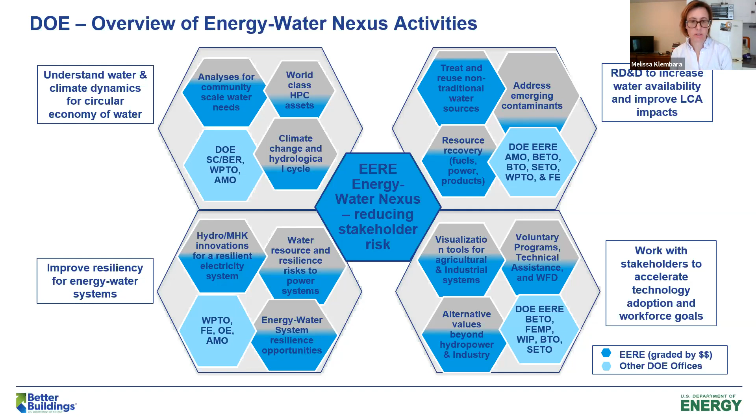The series of our presenters is going to be Prakash Rao from Lawrence Berkeley National Lab, who's going to talk about this big impactful report that we're doing with the Advanced Manufacturing Office. Prakash works closely with the Advanced Manufacturing Office and our strategic analysis team, thinking through the potential in the energy water nexus space, especially in industrial wastewater treatment, and was a big contributor on the desal bandwidth study that became very important in the vision for what impact we want to have in desalination in the energy water desal hub that we're doing with the National Alliance for Water Innovation, which is actually led by Lawrence Berkeley.

And then we're going to have Rishabh Bahel co-present with Kiran Thirumaran at Oak Ridge National Lab. They are going to present on a case study that the National Alliance for Water Innovation is sponsoring with Cleveland Cliffs on the steel industrial area for industrial wastewater treatment. And if you can go to the next slide.

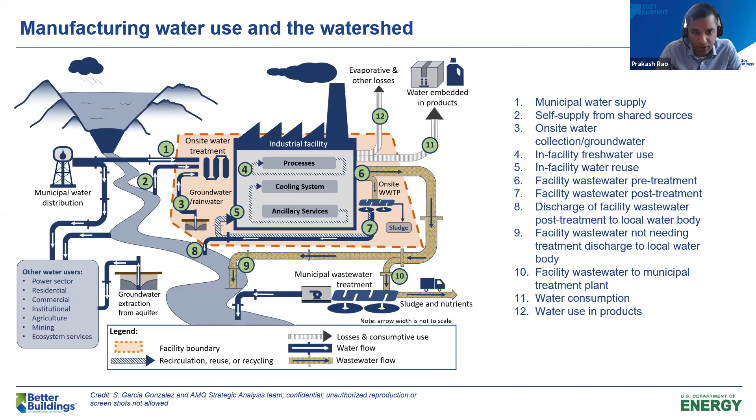Next slide please. If we look at how much is on that 1, 2, and 3, the water intake, this is from 2010. The last estimate showed about 21,000 million gallons per day of water used for the manufacturing sector, about 6% of all water resources in the U.S. That might not sound like a lot, but the map on the left shows concentration.

If we look across the map, each of those little geometries identifies counties. You see really high concentrations in some places like Lake County in Indiana, Brazoria County in Texas, right by Houston. These have very large concentrations of manufacturing water intake.

While it's 6% nationally, in some of these counties, about 60 or so, manufacturing water is actually about 75% of that county's water intake. So it's really spatially important. As mentioned before, it's really hard to transfer water long distances, so these manufacturers are a very important user of water within the communities in which they live.

On the right-hand side you can see the data chopped up differently, looking at state by state. Indiana, Louisiana, and Texas are 1, 2, and 3 manufacturing water users. But perhaps more interesting is what sectors of the economy are using water. There, 95% of manufacturing water use sits within 5 sectors, and these are all estimates.

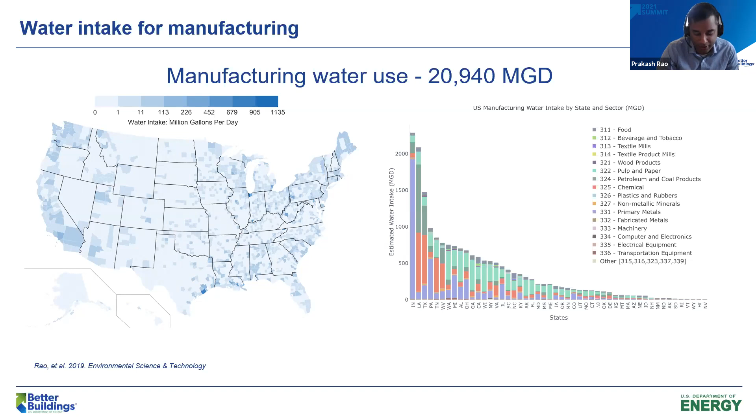Next slide please. So that's looking at the intake. If we look at the exit, the wastewater, that's where the interaction with the municipal plant might happen, whether on the technology side or whether it's sending its wastewater to the municipal plant for treatment.

On the left-hand side, what we've looked at is based on permits and the names of the contaminants in the wastewater that need to be treated per the permit. Chemistry savvy people will note some listed here are actually test methods for an indicator, some are actual chemicals, but it's what's on the EPA permits. We wanted to show this to outline how municipal water is different from manufacturing water.

Where are there differences where we need different technologies and approaches, and where are there commonalities where what they're disposing and need to treat is similar? The Venn diagram in the middle shows things like BODs, nitrogen, phosphorus, alkalinity, oils and grease, dissolved solids, solids, suspended solids. Those are common.

They're going to see common wastewater treatment methods within the two sectors, municipal and manufacturing, to treat those. But manufacturing also has some specific contaminants you don't always see in the municipal sector, shown here on the right-hand side, like nitrate compounds, ammonia, sodium, et cetera.

As we think about the treatment processes and the technologies, you can broadly break them down into three categories: physical processes, chemical processes, and biological processes for treating these wastewaters. Some are common with municipal and manufacturing wastewater treatment, some are not, or are less common.

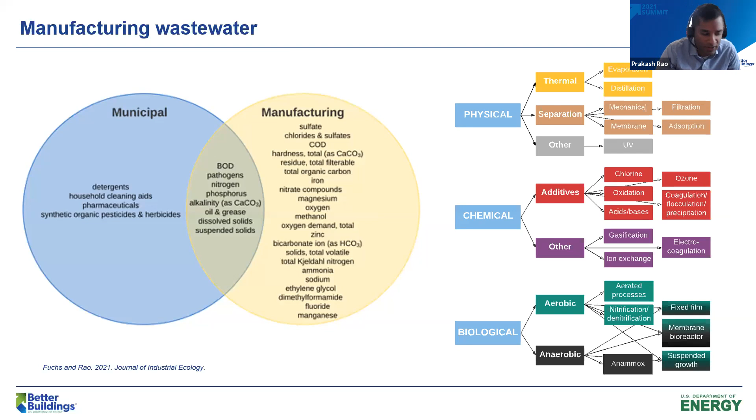Thinking about what we could do regarding water conservation and water management, and what really drives this - the common refrain is that water's pretty cheap, and that kind of hampers efforts to conserve water.

But we've started to consider this from the WRI, World Resources Institute's Aqueduct tool, the way they look at water risks, quantifying them in terms of physical risks, both quantitative and quality - so either there's not enough physical volume of water, or the quality is too poor to use for the purposes the watershed needs.

There are other risks too: regulatory and reputational. Regulatory might be imminent regulation on water, whether limits on groundwater usage or limits on how much you can pull from a lake. There's also reputational risk, harder to pin down, which is the idea that you're given a community license to use water, and at any time that community can revoke that license through community action. So there's a drive to be good stewards of water to avoid reputational risk, and of course, just to be good stewards of water.

If we think of what we can do on the right-hand side - it's a fancy graph with a box and whisker plot, don't worry about the details. The idea here is that as we think about risks and water conservation, we think about what are some easy things we can do where we need technologies, or places where we don't need technologies because we're actually already using the right things.

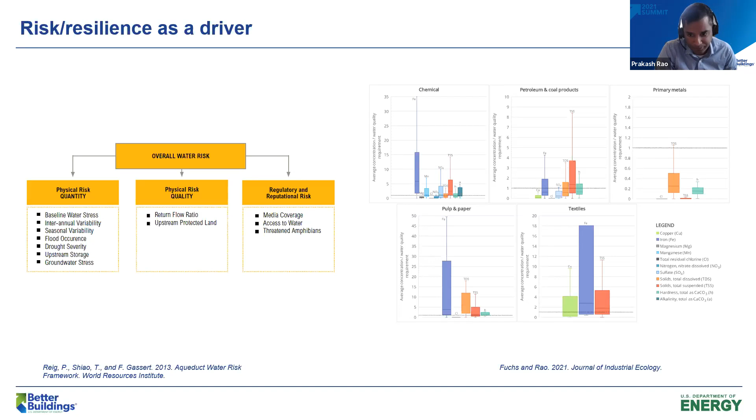Just to highlight some of the great things our partners are doing in the technology space, Nissan and Harbec are two partners in the water savings initiative of Better Plants. Nissan optimized their paint shops and the rinse systems within those, which is a huge energy and water user within the manufacturing footprint at the facilities. By spending $600,000, they're able to reduce their water use in the rinse system by 65%, almost 50 million gallons a year, just by optimizing how the paint plant uses water and being able to reuse more.

And we talked about rainwater harvesting. Harbec is a partner, and both these solutions are on the Better Building Solutions website. They are investing in rainwater harvesting, and they've been able to save 800,000 gallons per year by digging rainwater ponds and using it to offset cooling tower loads. The cooling towers are running great, no concerns. I know there's some concern about doing that by some, but their cooling towers are running great. And they're also saving on fire insurance because the ponds provide another layer of fire safety.

So with that, I think I'm probably a little bit over my time, so I'll just wrap it up and thank you for your time, and look forward to any questions.

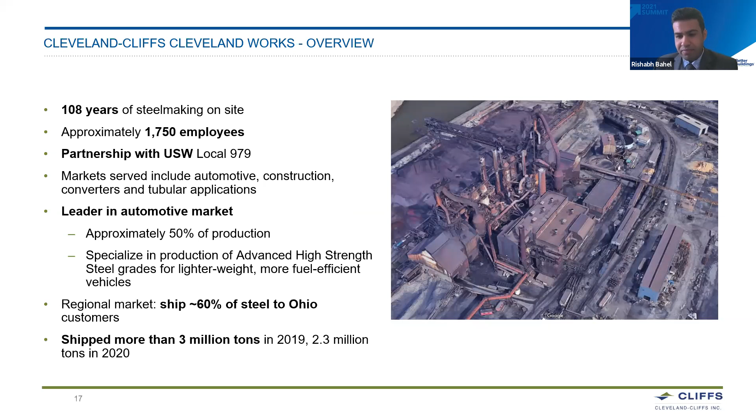You're using water for quenching at the hot rolling, at the hot rolling coiling, and the cold rolling. But other areas where water gets used a lot is at our powerhouses, where the boilers are consuming water for steam production, at our blast furnaces, our BOFs. The main issue is that we are using a lot more water throughout our system.

Out of which, what Prakash was saying, three are the main areas that we are pulling water from, and that is totally true for our case as well, with municipality at number one, and shared river resources at number two. For us, the shared source of water in the Ohio region is the Cuyahoga River, and we rely heavily on pulling water out of that.

But again, we have to be in compliance with the NPDES permits and other requirements. So we treat it and bring it back into the river. 6% of the water we are consuming in this plant is municipality, and 94% of the water is from the shared source of water.

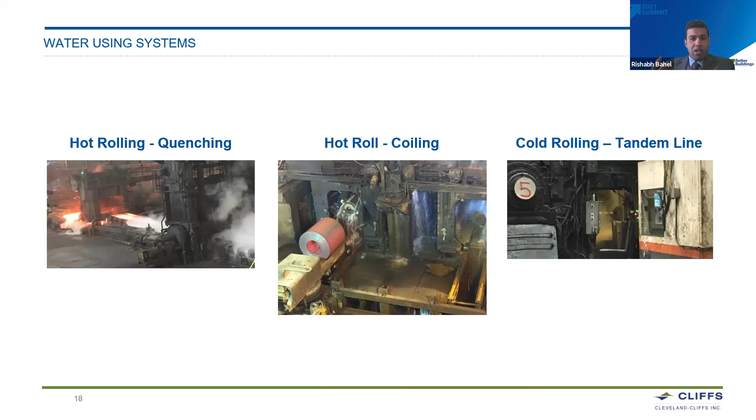Going back to what Prakash mentioned, wastewater treatment - we are using our water, it goes through a number of processes, as I mentioned in the slide prior. When this water goes through these processes, it is no more municipal water or shared source water. Now it is processed water. And when you're discharging processed water, it has to go through certain treatment and classification processes before it can be discharged.

Prakash did mention you can send it to the sewer district, which is like your city municipality treatment system. But most of the contaminants you'd pick up from a steel mill or manufacturing site are not the contaminants you'd send to a normal water treatment plant, because they're not really equipped well to handle this. So plants like us build our own wastewater treatment plants.

At the Cleveland site, we have six wastewater treatment plants, and the one you're seeing pictures of is one of our bigger water treatment plants. In here, we have different systems.

For the metal removal system, that essentially takes the water coming back from our metal system. The oil removal system is where the water is interacting with oil, and the water coming back is bringing oil along with it. These two systems go through their process of treatment, which uses chemicals, different types of flocculation, skimmers, vacuum filters, because our end goal is to bring it back to a compliance level where we can discharge it into our shared source of water.

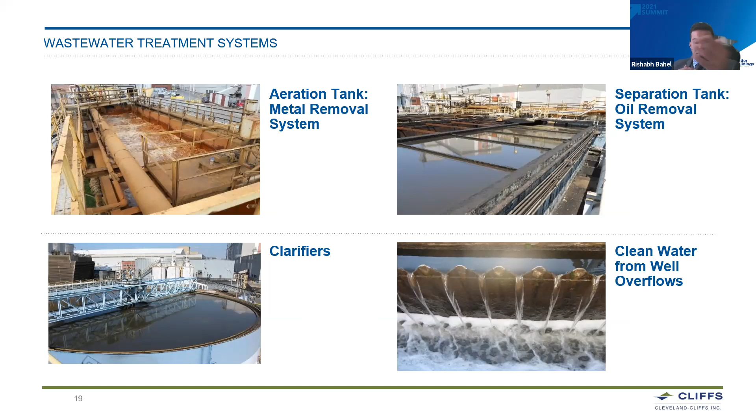Rishabh gave a really good overview of the facility and the types of processed water being used and the wastewater treatment being done. I'm going to concentrate a little bit on some of the work we have done at Cleveland Cliffs over the years as part of DOE's various efforts.

As part of the Better Plants program, we did a water assessment at Cleveland Cliffs a couple of years back. And right now we are working as part of the National Alliance for Water Innovation to do a techno-economic assessment of their wastewater treatment systems.

What you're seeing here is one of the results from the water assessment that we did. As part of it, we basically baselined the water consumption at the facility, which involved creating this water map you see, trying to understand where water is used, how much is being used, and how it is being treated and eventually discharged.

Rishabh gave the numbers, like 93% coming from river water and 7% coming from city water. So we were trying to track how much of that is being used in the process and eventually being discharged.

We also identified the true cost of using this water. This becomes relevant, as Rishabh mentioned, when they are evaluating projects for water conservation. So true cost meaning we are trying to understand not just the direct cost paid to the utility, but also the indirect cost of treating that water, pumping it to its point of use, and all the costs associated with that.

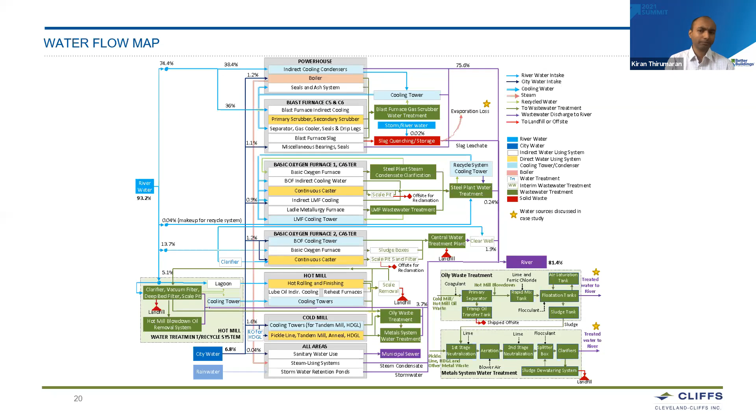We find that principal treatment for both systems are big chunks of the cost components, with principal treatment for oily waste being the flocculation and coagulation step. We were able to go into a little bit more detail, identifying how much of the component is coming from chemicals, how much is coming from mechanical systems, and so on and so forth. That's the techno-economic analysis we did as part of NAWI.

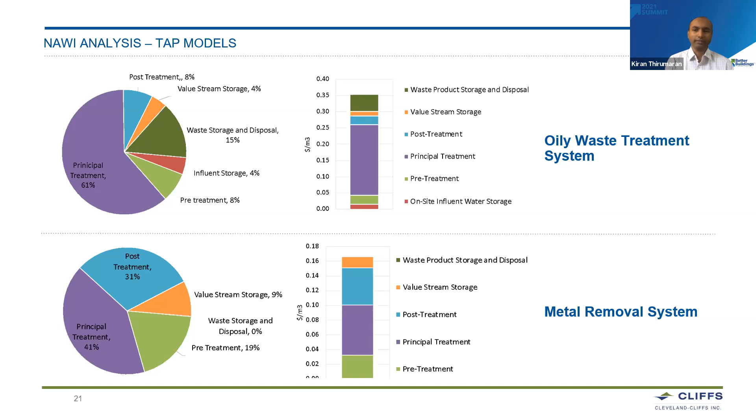From these assessments and analysis, we were able to understand the system better, trying to understand where the cost is for water use and wastewater treatment. We came up with some opportunities for the facility that I'll cover in the next couple of slides.

One straightforward opportunity we identified: as Rishabh mentioned, they treat the water to a quality on par with the city water they receive, but still discharge it to the river. So one opportunity was to recycle the water leaving the oily treatment and metal removal system and use it back in the cold mill and hot mill operations. That would offset Cleveland-Cliffs' city water use and reduce the facility's dependence on municipal infrastructure.

Another opportunity is condensate recovery in quenching. Steel and slag use a lot of water to quench, and if the appropriate conditions are there—if it's done indoors—there's an opportunity to recover some of that condensate. If we set up hood infrastructure, there's a possibility to recover this, because condensate is pretty clean water. You'd be able to use that water for other applications without drawing in new water for your facility.

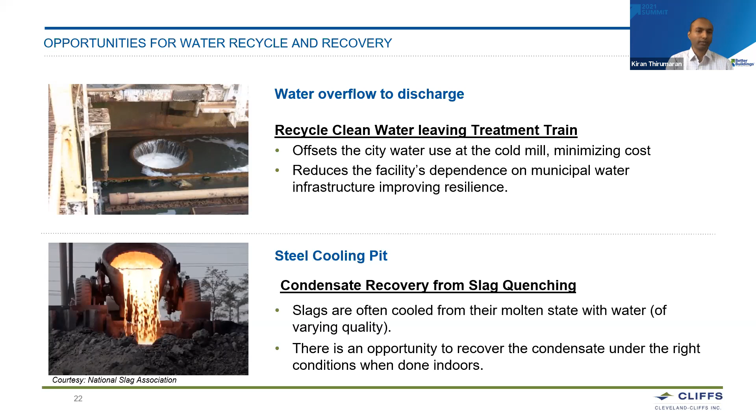Some other recommendations from the assessment: one is reducing chemical usage. The existing system uses chemicals for flocculation and coagulation. One opportunity is to reduce chemical consumption, either by using new water treatment trains—Rishabh is going to talk about some new technologies they're considering for this purpose.

Another opportunity is using byproduct chemicals. There are chemicals produced in the steel making process itself which could be used in the water treatment system without adding additional chemicals. For example, for pH neutralization, some of the high alkaline storm water that comes in contact with slag could be used. So that's another opportunity to be explored.

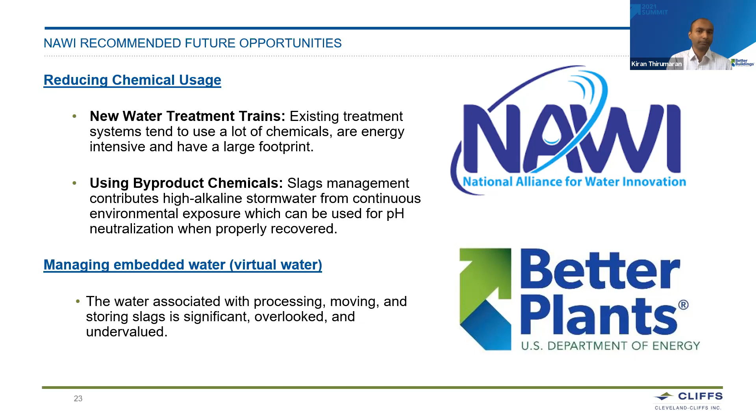Thank you, Kiran. As Kiran mentioned, the true cost of water is one important thing we've understood through our partnerships with DOE and with NAWI: when you're looking at a water conservation project or water management, you really have to use the total cost of water in justifying your case and putting that into your ROI.

One of the biggest components pushing through this true cost of water was chemicals, because of the amount of chemical treatment we have to do to make sure this water is within our permit level before we can discharge it into the river through our authorized discharge. We saw that chemicals was a big cost, so we've been spending a lot of time figuring out what we could do to reduce our chemical spend and increase our water reuse throughout the site.

With the limited time we have for this presentation, we are going to talk about one of these opportunities and technologies that we are currently looking at.

And also we are in talks with the Better Plants pilot program, where they're looking at seeing if this technology would work for our site too.

This thing is called electrocoagulation, which already has been mentioned by Prakash in his slide, but it's one thing that hasn't been utilized a lot in the steel industry. It's a very highly effective electrochemical approach for the treatment and removal of contamination from water. This process destabilizes suspended, emulsified, or dissolved contaminants in an aqueous medium by introducing electrical current onto the medium.

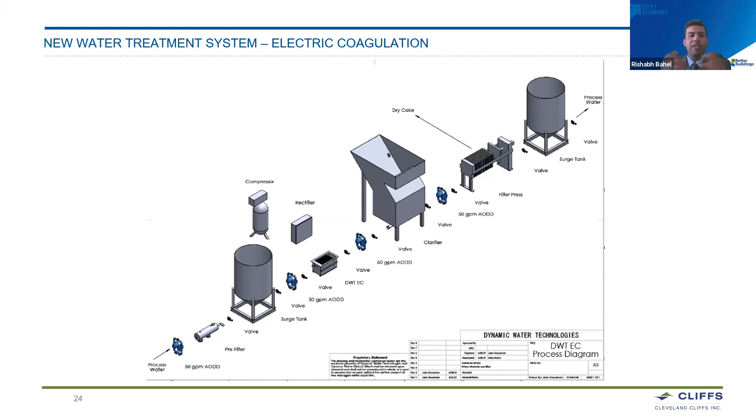Now that you've separated the oil, you could even reuse it and sell it to another person for reuse and reclassification. And with the sludge, sometimes the material is really good, so you can sell it for construction and other purposes. So essentially, just by treating your water correctly, you're creating other useful elements that can be utilized by other industries. That's why we really like this process, and we're really trying to pilot it further to see what we can do with it as time goes forward.

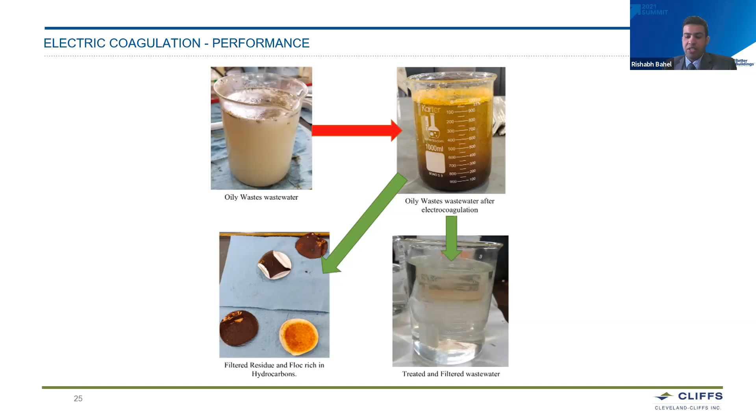We'll just go to the next slide. I know we're running short on time.

In conclusion, water is a constrained resource, as was mentioned clearly by Prakash in his opening. And as Melissa mentioned, water and energy are highly correlated—the water energy nexus. As we've spoken about a lot, we are a water intensive industry. So if we're taking the initiative, it's important not just for us, but for the places where we're operating—it gives us our license to operate. We would continuously innovate and need to see what other innovations are happening outside to stay on track with water management and water conservation.

And again, it will not be possible without the great partnership with Better Plants, National Alliance of Water Innovation and other DOE partnerships. I'll give a shout out to my technical account manager, Sachin Nimbalkar, who has been good at bringing us new opportunities and connecting us with people like Kiran and Prakash and Susan, so we can learn from them and create technologies and papers to share and discuss. Appreciate it, thank you.

I'm looking forward to more questions. Thanks, thank you Rishabh and Kiran. So we are running really tight on time.

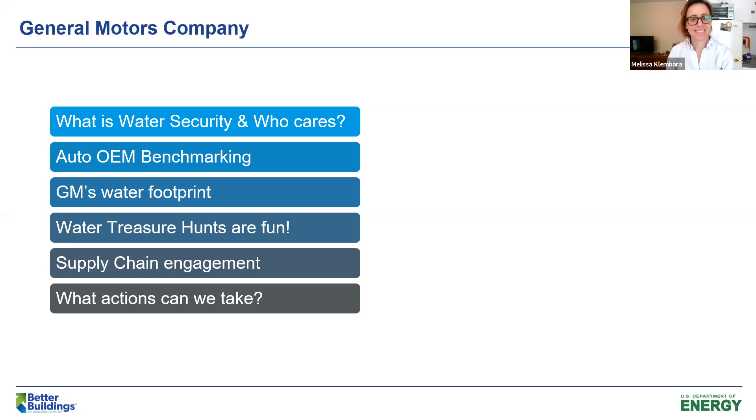Thank you. So here are the topics I want to cover: water security from an automotive OEM perspective. You didn't see our name up there at the beginning as one of the big water users, however many of our suppliers are large water users, and so we are very interested in water security.

We'll talk about who cares. I'll review some benchmarking information, look at our footprint. I love treasure hunts because they're lots of fun, and we do energy ones, we do water ones. Since our supply chain is so large, I'll show you a few engagements that are out there. Lastly, I'll leave off with some actions we can take, but probably won't get into too many details, just leave them with you.

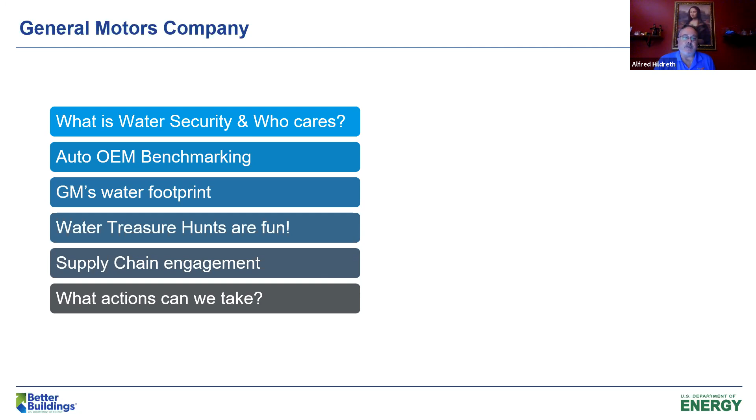Next slide please. General Motors is a member of the UN Global Compact. We just recently signed the CEO Water Mandate, so water is embedded into our business plan. We have a goal out to 2035, from a 2010 baseline, to reduce our water withdrawal by 35%.

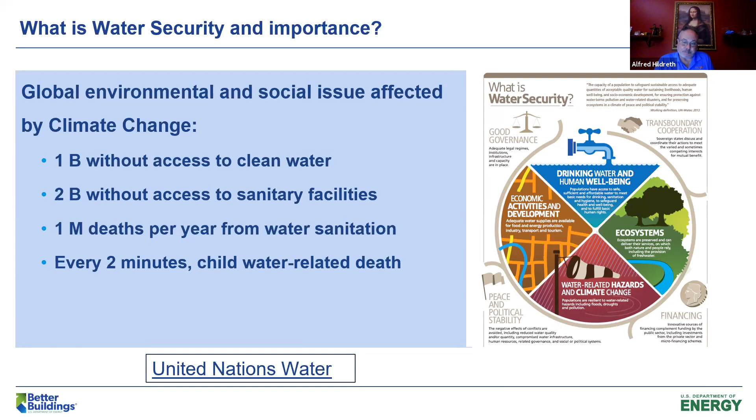One example of who cares about this is the folks in Mexicali. They voted no on a beer factory because, they said, the Colorado River used to flow here and it's not any longer. That's one example of water security. Next slide please.

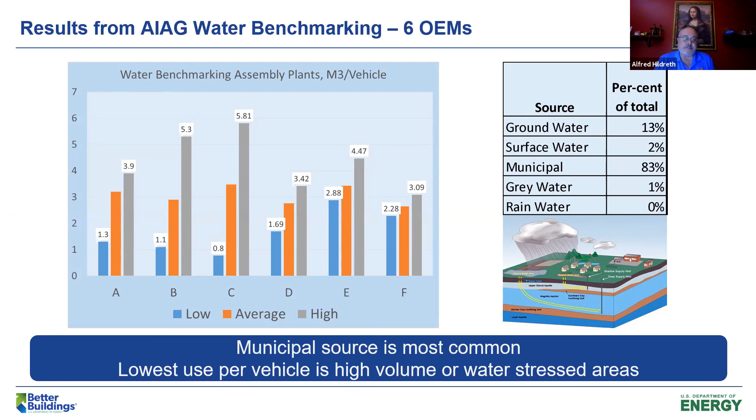Next slide please. The cool thing about that was it showed us we have some high plants, some really low ones. When we talk about zero liquid discharge, which is one of the examples I'll use, all of us were not too far off the average. So I think everyone's really informed and feels this is very important to us.

I won't go through these in detail - actually I think a number of them were already mentioned - but measuring is extremely important, right? Because that's the only way you can make improvements and measure whether it was successful or not.

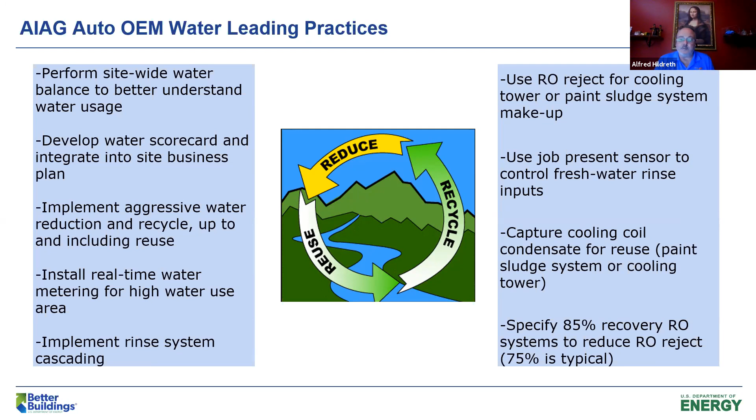Just some basic things, using job present sensors to control freshwater rinse inputs. So when a vehicle's not in place, you don't have to rinse it, stop the sprays. That saves a lot of money, especially when we look at the true cost of water, which I'll talk about in a little bit.

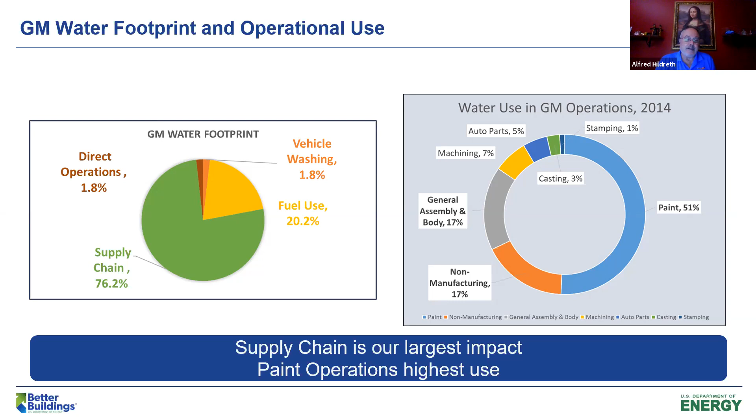So I talked about treasure hunts. Water treasure hunts are a lot of fun. This particular site had a lot of people on it—9,000 people, a design center, a couple assembly plants, offices, et cetera. I think the message that made this one successful was the fact that we used the total cost of water. The plant had done some studies in the past; they kind of knew where some leaks were at. They knew the paint shop was a large user, so we helped them put some numbers to it.

We did a water balance, which is really the first thing you need to do, as was discussed earlier. We came up with the fact that the cost to heat the water was more than the cost of the water and sewer together. This particular country has a really high natural gas rate, and I knew that because I lived there for a while. So we really focused on that fact, which can cut your payback in half. That's really good. We found some opportunities, and the plant is in the process of implementing them.

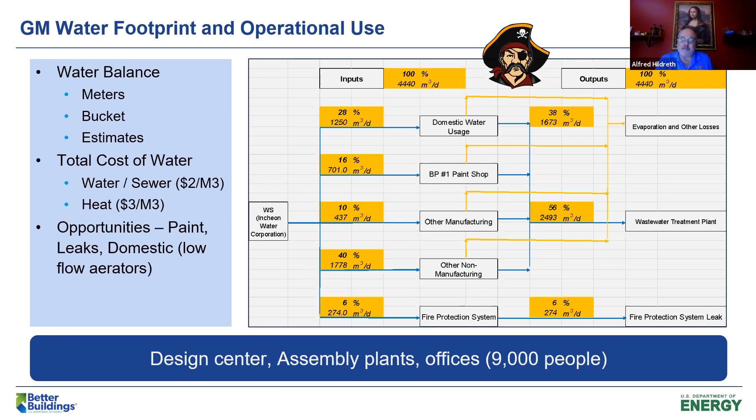So the true cost is why it's so important—again, water's fairly cheap. If I had time to do a poll, I'd ask you where in the world you think water, from our perspective where we have assembly plants and manufacturing, is the most expensive. You'd probably say China or Mexico or someplace like that. But it's really the Great Lakes state of Michigan, where I live. It's the highest cost when you include sewer cost into it.

So we have some great opportunities here, where we have a lot of manufacturing in kind of middle America. But most raw materials that businesses use require water, and you can kind of see the different regions where water scarcity is. That should give you more incentive. So even though the water may be cheap, you can't run without it, right? So you have to do something like water reuse. We find that in Mexico, where we're water stressed, it's not a matter of cost of doing business—it's a matter of doing business or not doing business. So it's really important to look at water security.

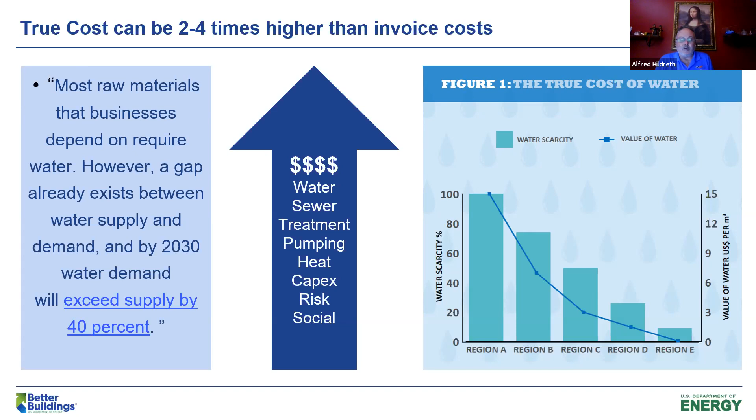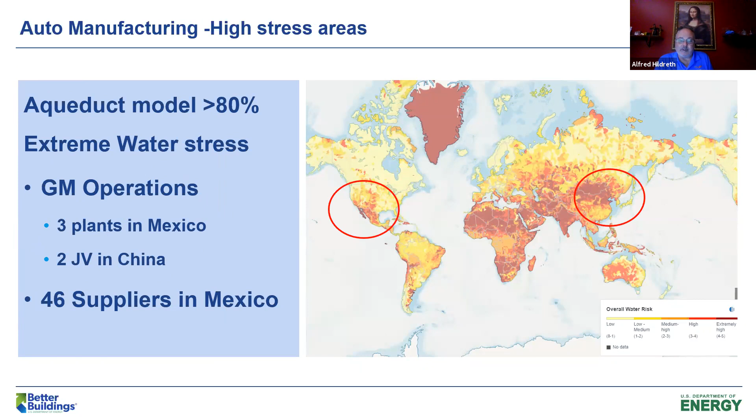Someone mentioned the aqueduct model—we use this to identify extreme water stress and then supplement it with local knowledge as well. We have 3 plants in Mexico, 2 joint ventures in China that are on the water stressed higher-than-80% list, and about 46 suppliers in Mexico. So you can kind of see the hot spots there in the world where you'd expect them to be.

Our supply chain again is a large impact—800 million cubic meters, or about 320,000 pools. Anywhere you're water stressed, you typically have to do some sort of recycling, or, at this particular facility in San Luis Potosí, out in the desert area, we use a zero liquid discharge technology. What that means is I don't really have to worry about contaminants leaving the site, because they don't leave the site. All the water is reused; the only losses I have are in evaporation.

So if I want to reduce my water even further, I can do some conservation techniques, things like that, but I could reduce evaporation too. Once you get to zero liquid discharge, about 70% of the water just gets reused, and maybe 30% evaporates. Really important system for water security, because if the wells are stressed and they're typically 600-meter deep wells, you need to do something different than trying to take water out of the well all the time.

Next slide. This is kind of a picture of the impact, and you can see body steels up there at 29%, seats 22%, total interiors if you add those up about 62%. So those are pretty high hitters.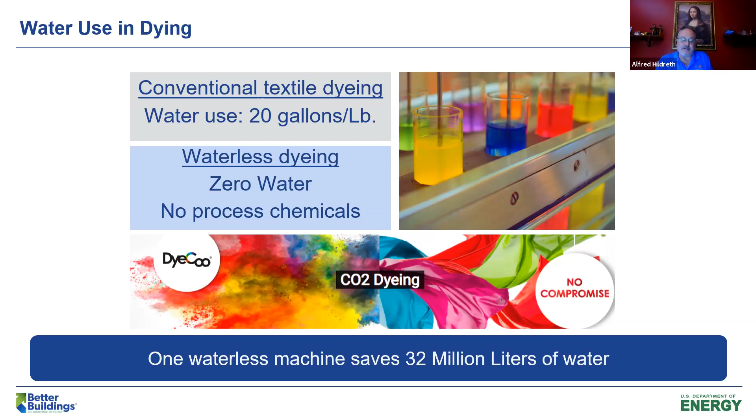Next slide. I'm not going to be able to go through each one of these, but take time and look at them, they're really interesting. Sometimes just showing this to people and talking to them about it changes their behaviors. That's really what it takes.

So you might not be able to get rid of leather shoes, and everyone loves cheese, but probably things like single-use water bottles, a 24-pack, look at how many millions of gallons of water that represents in a life cycle. It's huge. So there are some things we can do from a personal standpoint, as well as extend into our company for water reduction. Figure out what your water footprint is and pick something you can do to reduce it. Next slide.

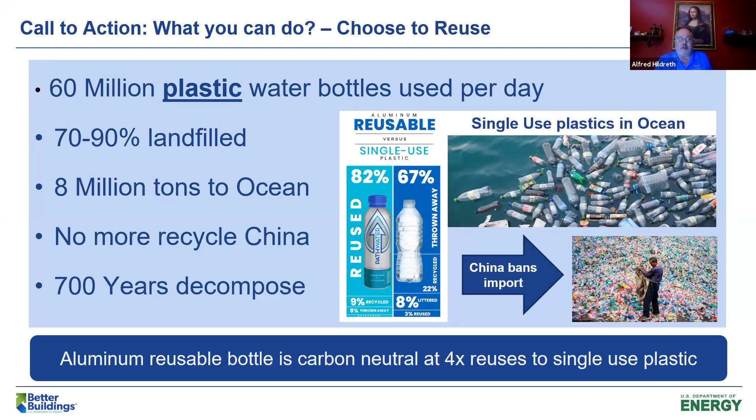Just a little bit more on plastic water bottles. This is one thing - when I started seeing the statistics a while back, I decided I'm not going to use single-use plastic water bottles again, and I switched to other more sustainable methods. This says an aluminum reusable bottle that is carbon neutral at 4 times the reuses compared to a single-use plastic bottle. So it really makes a lot of sense, not only from a water standpoint, but also from carbon neutrality and decarbonization. Next slide.

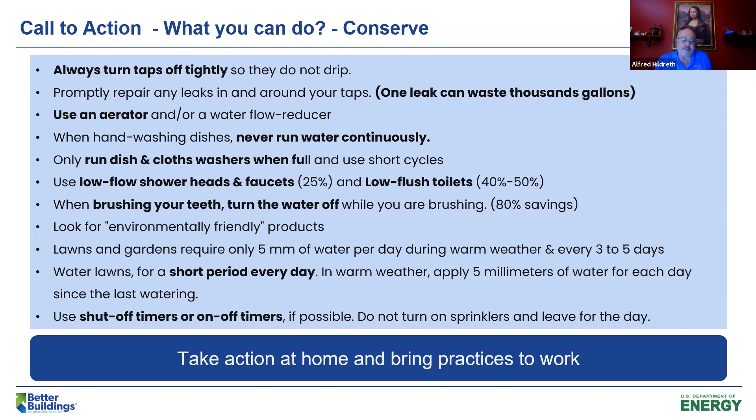Again, I can't go through all these, they're lots of fun to talk about, but turn taps off when you're not using them, use an aerator, run dishes and clothes when full. All these kinds of things are great tips and really don't cost you anything. Next.

So I don't know if we have time for this, I'll leave this to you whether you have time for the video. If you don't, we can just send them the link and they can look at it. This is a really cool video though - it's the first day in a town in Madagascar that's got running water. It's hard to contemplate that if you've grown up with running water in your house or elsewhere. So I'll leave that up to you, Melissa, either way. I think we have time.

Thank you. I think that sums up why water is important. To see the look on those folks' faces to have clean running water is just really amazing. So thank you very much. I've left a few other links for those and others in our slides, and we'll go on to the next presenter.

Great, thank you, Al. Thanks for zooming out a little bit too. I know we've been leaning in on municipal and industrial wastewater treatment, but thanks for providing a bit of the bigger picture perspective of the impact we can make as individuals, and even bringing in the environmental justice aspect of why it's important to provide clean water and make sure we're good stewards of the environment in the sustainable water recycling we're doing in industrial and municipal space. So next up, we have the Water Research Foundation presenting on, going back to the symbiotic relationship and some of the technologies that Prakash touched on earlier, that Venn diagram overlap between industrial and municipal sectors.

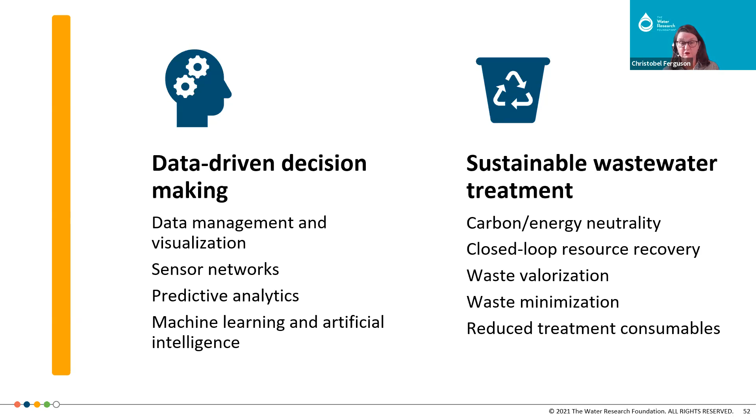So with that, I'm now going to hand off to Erin, who's going to dive into those topics in some more detail. Thanks, Erin. Thanks, Christobel.

I'll take it over here to give some examples of technologies from our platform that fall into these categories, and also highlight a few that exemplify the intersection of municipal and industrial technology development.

Our first category here is innovative products in data, and we have three subcategories that we put together to capture the development in this space. They do overlap, but they also demonstrate some key points of focus. In our first category, we have centralized and actionable data. This refers to technologies that primarily wrangle data and make it easier to view, assess, or report collected data. The second one is asset monitoring and feedback - technologies primarily geared towards interfacing with unconnected assets. And the third, self-explanatory one, is prediction optimization - technologies that offer computing services to algorithmically offer suggestions for actions and decisions. Just to highlight a few of the technologies we pulled out in these categories.

So we have the big Z here for Ziptility. It's a smartphone app-based asset management visualization tool. Iris is a data aggregator and dashboarding software. We have Fend, which is a data diode technology for one-way data flows, to enhance cybersecurity for industrial control. The yellow hydrant here is a technology called hydrant.ai, and it uses hydrants in water distribution networks as access points for data collection. Pluto AI, on the right side, is an AI product for unstructured data to predict the future behavior of a plant. VODA.ai, similarly, is an AI to clean data and predict risk of failure for pipes.

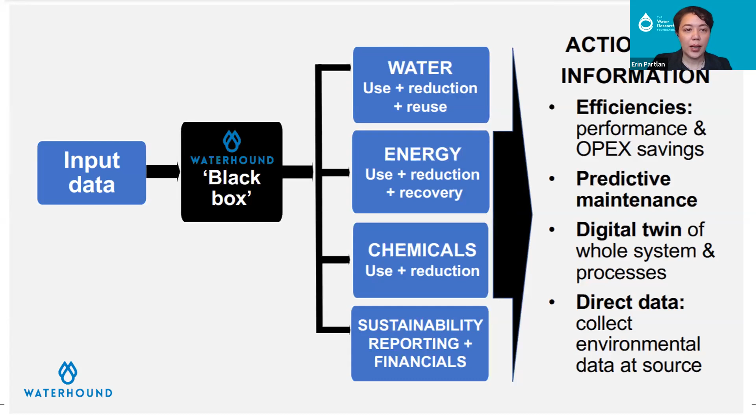Waterhound is a great example of technology that's been trained in the industrial space. They look at water quality and contaminant relevance, focusing on industrial wastewater treatment primarily. But recently they've been awarded a California Energy Commission grant to test their software on municipal systems, so they're looking for partners in that area right now.

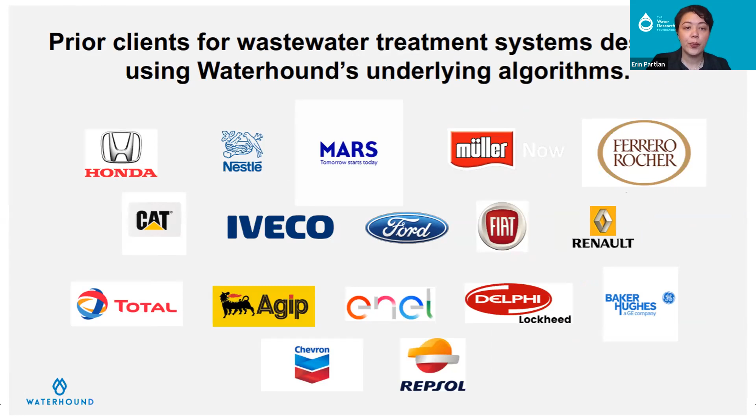Next technology I'll look into is one called Iris by the company Kayuga, K-A-Y-U-G-A. Iris is an asset management planning software that has both data collection and analysis components.

Iris is a software that seeks to help users answer questions such as, is my asset in good shape or does it need maintenance? And further, how much will it cost me both now and down the road? Behind the scenes, there's modeling that looks at the probability of asset failure, and its use leads to proactive asset management.

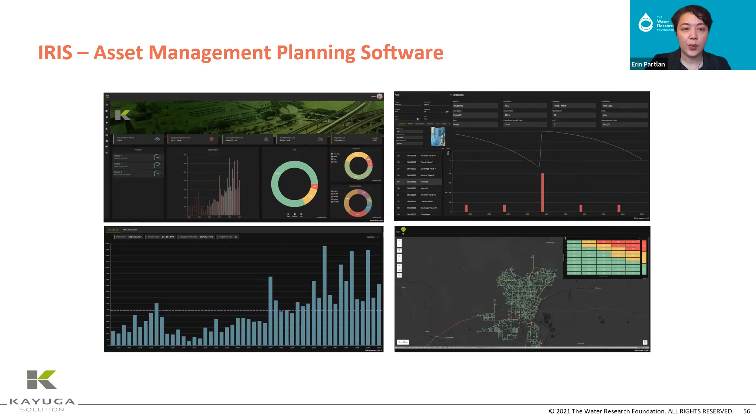A little bit more about behind the scenes, data-wise: the system pulls in from SCADA, LIMS, CMMS, GIS, and also financial data. Part of the analysis piece is the ability to dynamically update condition information such as age, maintenance, and usage from the CMMS updates, and they use those to calculate an asset condition score.

That gives you a traffic light, red, green, yellow, in terms of whether an asset needs maintenance immediately, in some time, or it's good to go. Iris has been used both industrially and municipally so far. It gives a lot of value for locations with a high number of assets and those that are rapidly changing, so they've been used at docks for maritime trade.

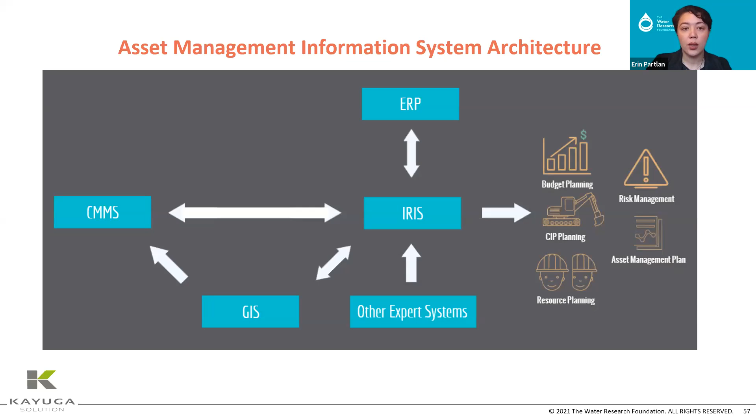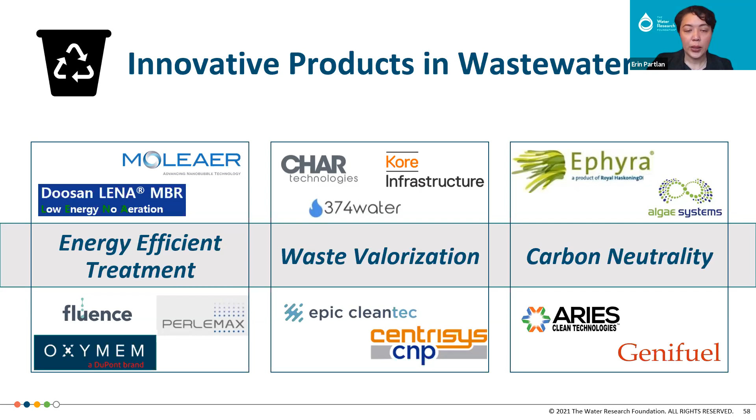In the last category, we have some common names, Genifuel and Aries, both biofuel producers. Algae Systems is similar to Genifuel, also using hydrothermal liquefaction to create renewable fuels. And then I will dive into Ephyra and Epic Cleantech for my examples. Next slide, please.

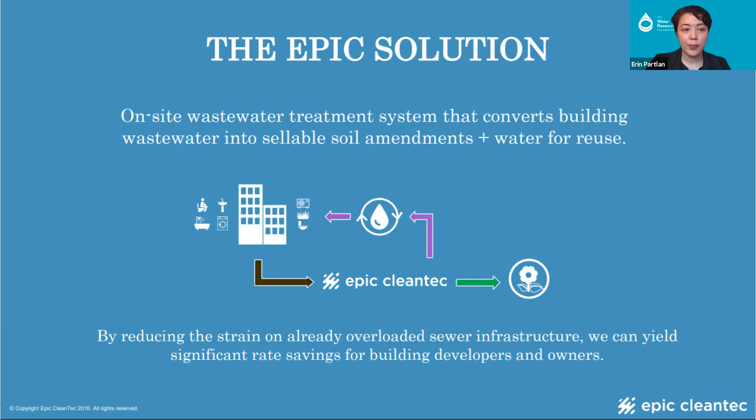An on-site system is actually not easy to get underway because of a lot of regulation and permitting issues. I wanted to point out the National Blue Ribbon Commission for On-Site Non-Potable Water Systems, a partnership between the U.S. Water Alliance and WRF, focused on making it possible for systems like Epic Cleantech to be installed. They produced a blueprint to help municipalities develop local programs for on-site water systems. So far, cities like SF, LA, New York, and most recently Austin, Texas, have started approval of on-site systems. This isn't specific to the industrial municipal gap, but I wanted to highlight the role of policy in enabling tech, especially in a decentralized market.

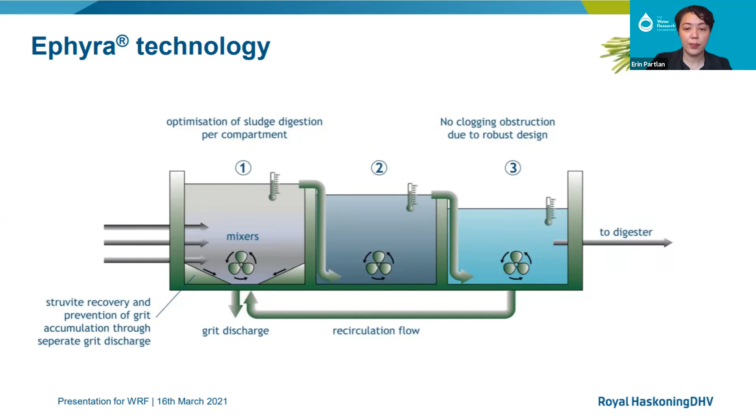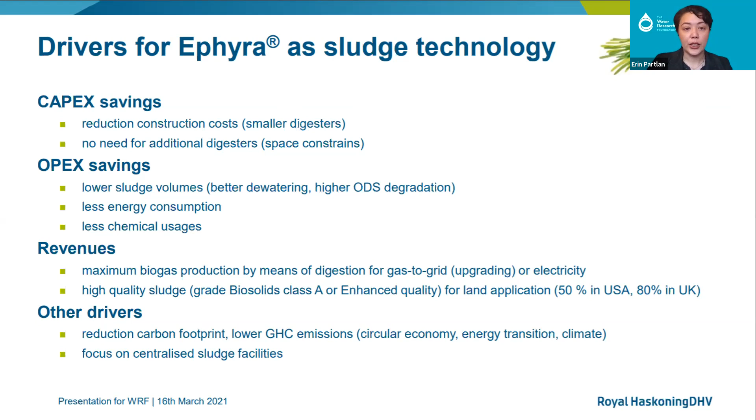At a high level, Ephyra is an ideal solution because it fits into existing reactor volume. Optimization results in lower OpEx, and on the point of revenue, it allows for a sustainable revenue generation plan through whole process optimization, using a combination of circular economy principles and enhanced sensor feedback and controls. The analogy here might be that Ephyra has been proven in the industrial side of municipal treatment, that is, the largest plants on the municipal side. So there's potential for adaptation of the technology to different scales of operation.

Thank you for tuning into this presentation. Feel free to contact myself or Christobel with any questions, or you can connect with the Water Research Foundation at any of these outlets.